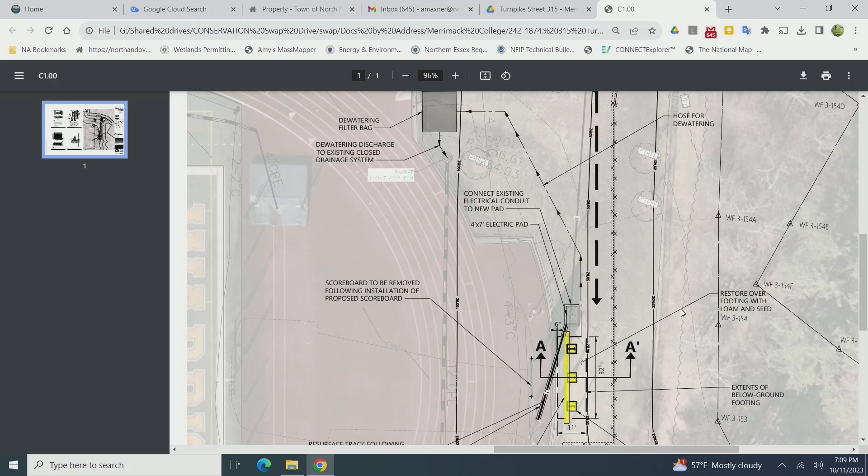They have submitted a request for a waiver for earth disturbing activities in the 50. However, no structures are going to be in the 50. So I'm thinking they don't really need a waiver to operate machinery and then return the area to pre-existing lawn area, but you guys can talk about that.

So that structure doesn't require a waiver? Right. And Jeff with VHB is with us this evening, representing the college, if you have questions for him. Yeah, I think it means it's outside the 50. Permanent installation. Right. So all disturbance is temporary within the 50-foot no build? Correct. Okay.

I watched there was an energized meeting last time you guys talked about this, and I understand where we are. I just have one question for you. One of your representatives represented that they were remorseful of how the project went, that the cart was put before the horse, that construction started before approval, and that it won't happen again. What I didn't hear was what went wrong, and I'd like to understand a little bit about what went wrong.

Good, I'm glad you're here, Felipe. For the record, Felipe Schwartz, Merrimack College. I think what went wrong was just a series of bad communication, right? We have a vendor with a contractor that got ahead of themselves. And they went ahead and did stuff that, in hindsight, I should have had a closer view of what they were doing, but it's a crazy time of year when it happened. So as it was going, I should have been there.

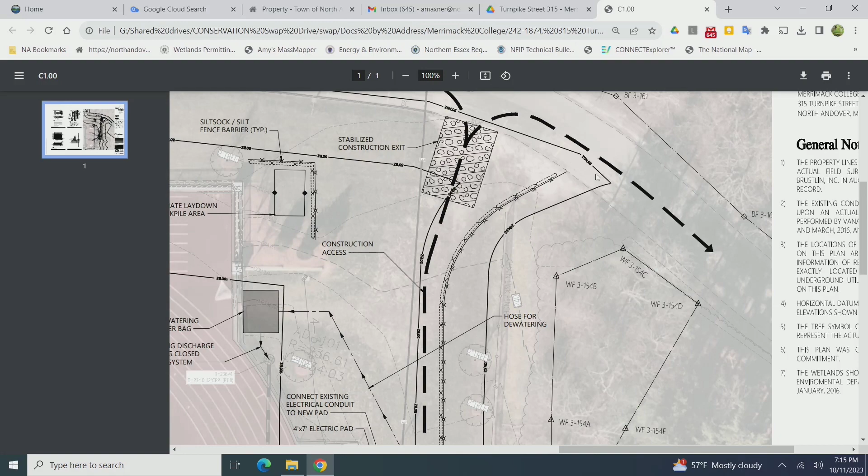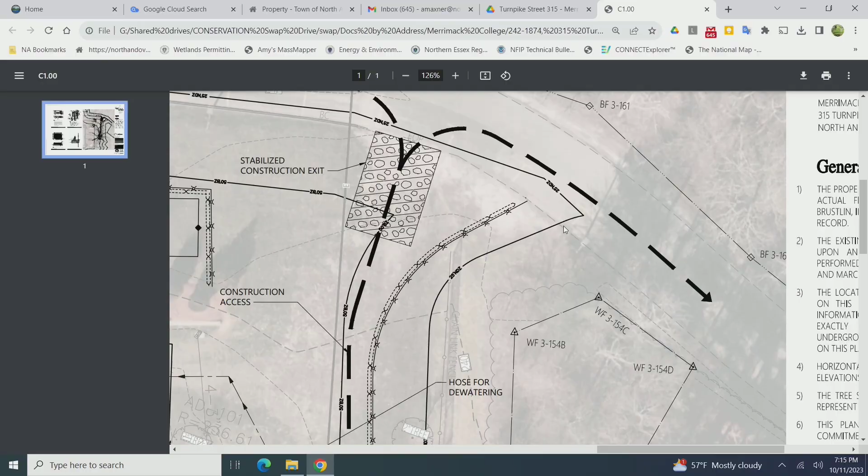Just a thought. How does snow get managed, I guess? Just a concern if it's an area where they pile it. We don't pile it there, right? That would probably prevent snow stockpiling in that area. We wouldn't stockpile snow in that area anyway.

Okay, so we can condition that, and Amy can direct plantings and location. Okay, so Amy, you're saying that they don't need a waiver, correct? No, because I don't see an alternatives analysis on this. Right, no, because structures are out of the 50.

Okay, all right, any more questions? Motion to close and issue decision within 21 days. Second? All those in favor say aye. Aye. Opposed? That's unanimous, thank you.

Thank you, okay, thanks. Hopefully I'll see them.

Justine, is Al right there? Is Al right there?

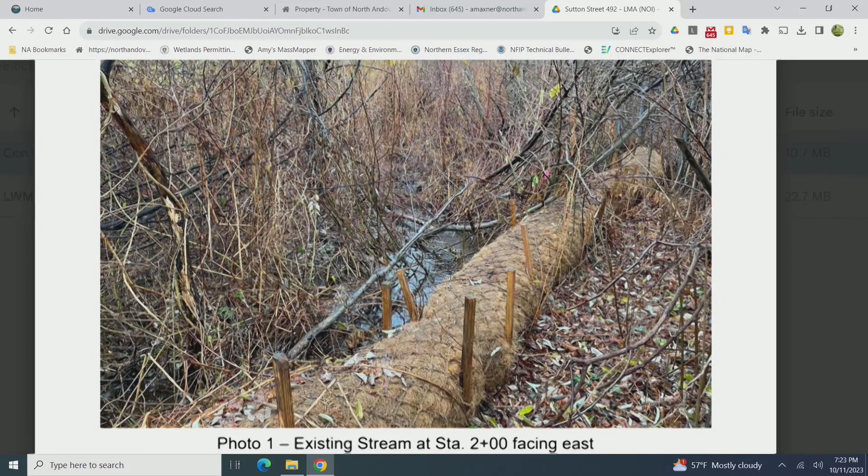The enforcement order issued over a year ago now, I called it a friendly enforcement order, allowed the airport to immediately get in there and put some temporary provisions in place. The overall purpose and need for this project is that we have a stream channel that has gradually lost elevation due to debris, vegetation, sedimentation.

And now the bank height at this particular location, this is pretty much the problem location. You'll see the stream on the left right there, and this is looking upstream. We have lost so much bank height there that storm events, without that coir log you see in the foreground, are subject to overtopping at the bank right there.

This is the section. So above this section you have certain bank heights, and below this section you have incredible bank heights, 2-3 feet or even more. But for this particular section, bank heights are a foot and a half, less than that at some points. It doesn't take much, with all the urban runoff this stream gets and its flashy nature, plus some of the storms we've experienced lately, for this to overtop.

As we recall that aerial photograph you saw, any water overtopping this portion of the bank flows generally west-southwest and does encumber portions of the Matthews Way subdivision drainage system, and also business along Charles Street as well.

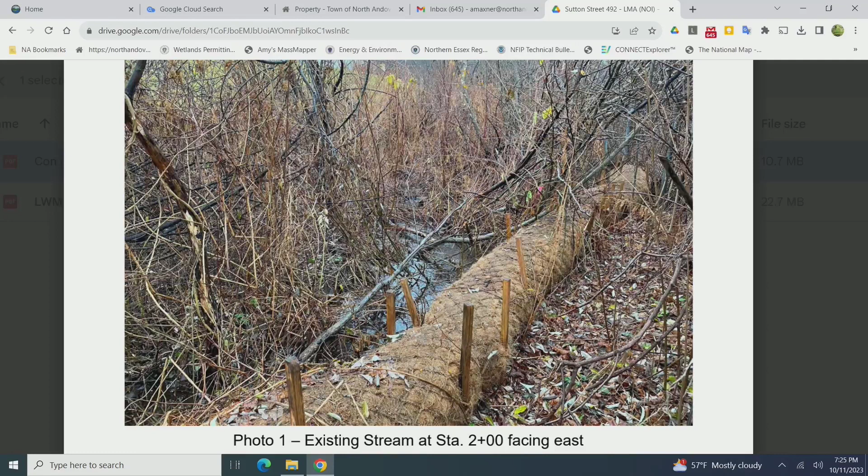These coir mesh logs, we had a lot of experience with them. We put them in place and they've done a really good job. Once they get wet, they hug the ground and put water back in its place, and they've done a pretty tremendous job. We put it for a good length along this portion of the stream.

But we amended the enforcement order, I think twice. We actually diverted more flow to this stream up at a red maple swamp above this channel to try to get more flow into here, because there's still flow beyond the airport property line that is getting down and causing some of the issues and concerns that have been voiced to us and to the commission over this past year.

And so these coir logs have been employed in several locations, not only to increase bank height but to divert flows and keep them in this stream, hopefully not adding to the problem being experienced downstream from this.

Next, Amy. This is looking downstream, just up from right at the Big Bend. You can see the airport fill platform, the green grass in the upper right. The left is the airport security fence. We're right along the airport property line at this point.

This basically shows the diffuse nature of the channel. The channel has really been lost as far as wood debris and sedimentation. It has filled in, and our bank height is almost nil at this particular location. Next, Amy.

And then a close-up where the stream is right against the airport property line, actually exposing one of our concrete bollard supports for the perimeter security fence. Something to note here is that this stream, immediately to the right or on the south and west sides, is completely bordering vegetated wetland for most of the route along our work area, whereas on the airport side we have bank but we don't have bordering vegetated wetland. That comes into play pretty significantly here when we talk about the design.

So, the important parts of our plan — this is a nice generalized list. I put a 1, 2, 3 summary at the start of the notice of intent outlining what the major components are. I'm going to go over those components real quick.

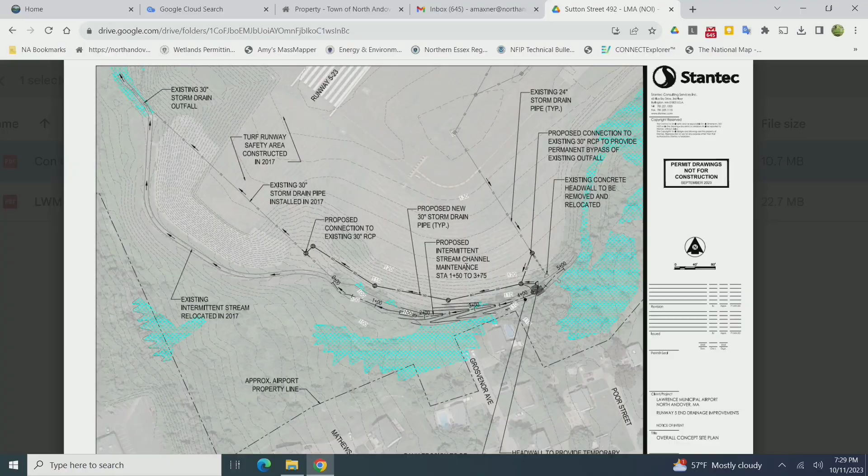Chairman, can we pause for about two minutes and ask a question? I want to form a basis for where Randy might go with the design. So you did gain a lot of experience and empirical data by seeing it happen — that's very valuable.

No doubt. There's been a lot of thought and concern that the source of the problem is multifold — it's the airport, it's the side streets, it's up above town roadways. Based on your observations, are you able to attribute this discussion we're about to have to address all of those, or just the things originating from the airport? No, it'll address the airport's issues and portions of the off-property ones — but not all, definitely not all. That would take almost a master planning type effort on behalf of the town, some private residential properties, and the airport. Would be quite the undertaking.

But I think what you'll hear is that what we have in place definitely takes care of our airport water, adds some of that residential water, maintains it into our stream, and more importantly gives this channel a volume capacity to withstand some of those larger theoretical storm events. Thank you very much.

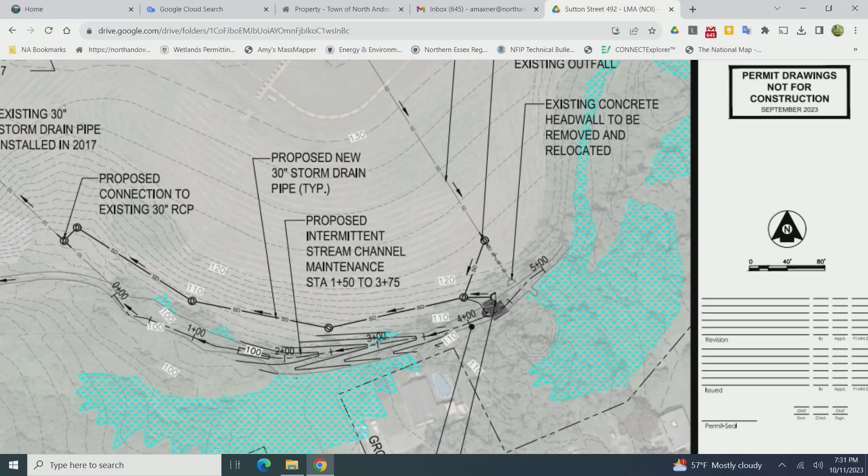First off, there is an existing stormwater outfall at the head of the system. It's a 24-inch outfall, currently draining approximately 15.5 acres of land on the airport property. On the plan it's called the existing concrete head wall, to be removed and relocated. That water is let into the stream above the problem corner where we're seeing the overtopping. We want to take that water — which is all stormwater, no base trickle coming out of there, no base groundwater flow — it's dry or wet depending on storm events, and that's it.

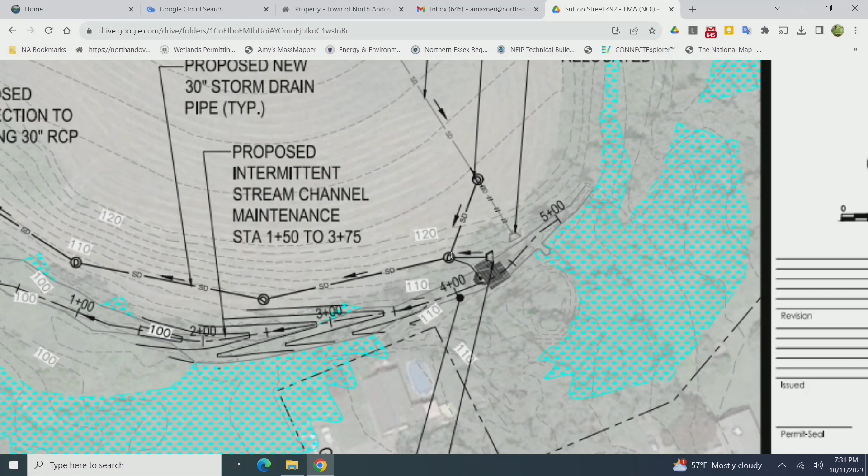What we want to do is take the peak runoff that particular culvert end adds, and route it around the problem area. It would be a significant undertaking if we didn't conveniently have a temporary bypass culvert, a heavy-duty one, that we had put in for the 2016 project. If you recall, we put a temporary culvert in to contain the flows and give our relocated stream in 2016 a chance to grow in.

Erosion control fabric is one thing, but if you're trying to do soft solutions, you've got to get that vegetation to grow before you dump some of these heavy flows into it.

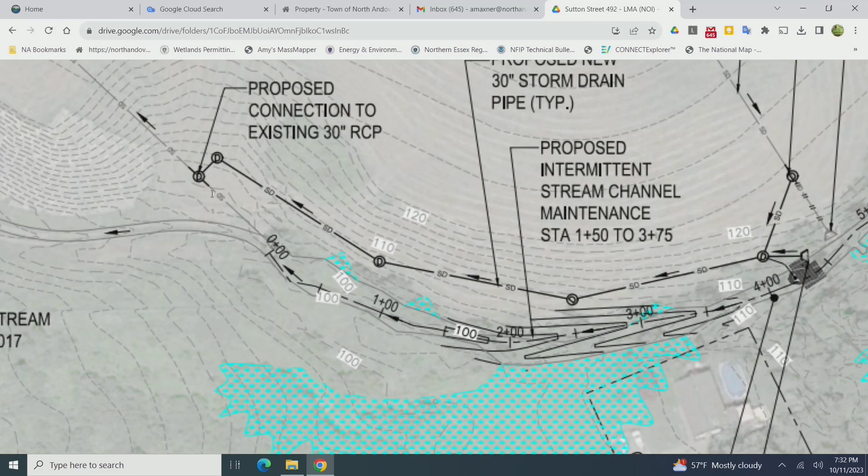So we put in a large 30-inch bypass culvert that we used to direct the high flows into while the relocated channel from the 2016 project got vegetated. And it worked perfectly. That thing is just sitting there now, a lot of public expense. It was a class 4 culvert because we had so much fill on top of it. It's a heavy-duty culvert, and it's a good size one.

We have the ability to reroute our 24-inch culvert above the problem area to downstream of the problem area by putting it in that culvert. It takes 15.5 acres immediately out of the watershed of the problem area, and it's stormwater that we're taking out of there. Like I said, there's no base flow maintaining wetland vegetation here—this is an outfall that flows only after storm events. So we'll be taking that storm flow and putting it downstream of the problem area, intercepting it with a manhole, taking that outfall out including the headwall, and revegetating it with inland bank, coir logs, loam backfill, live stakes and stickers, turning it back into vegetated bank at that location.

Where does that ultimately discharge? Is it over by the culvert underneath the railroad tracks?

Yes, so there are two downstream culverts. When we talk about dumping more water into this stream, I want everyone to remember this stream doesn't leave airport property and go right into the Merrimack River. There's the sewage treatment plant culverts under their entrance road, a nice double culvert, heavy duty, has always withstood all these hard storms, but it is theirs. Right below that is a less heavy duty one under the railroad tracks, in a very thick, nasty place to get to. But there are two owners of other drainage structures downstream from us that we have to consider during this whole process.

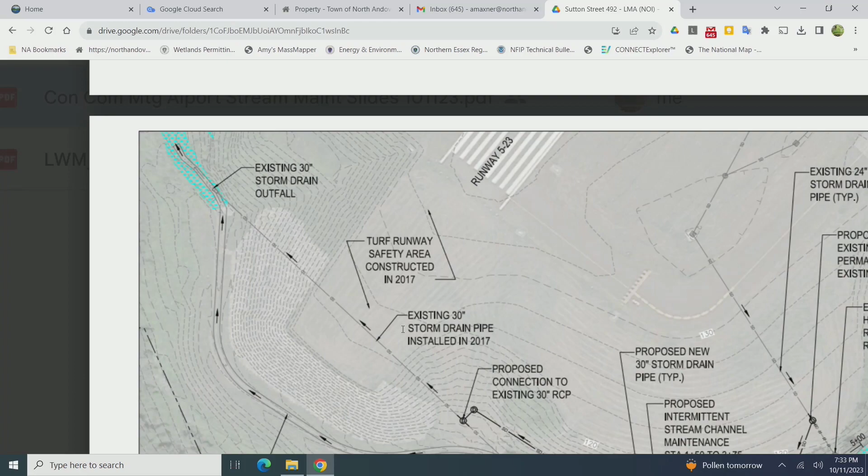Thank you. So the first big effort here, and this is one that was added late, was putting that series of manholes and pipes in on the upland green slope, putting it down, getting the slope necessary to get the water to that 30-inch bypass culvert and putting it in there, restoring it all to the same green grass slope as it is right now. So that is the first effort.

The 225 feet of stream that will be rehabilitated will have a basic cross-section with a 4-foot flat bottom contour, then going up on 3-to-1 side slopes on either side, creating a minimum 3-foot high bank along that section. Some sections meet grade and get higher banks because the natural contour provides for them, but for this section where we really need it, we want a bank height that contains the higher theoretical storm events. This particular profile obtains that control for us.

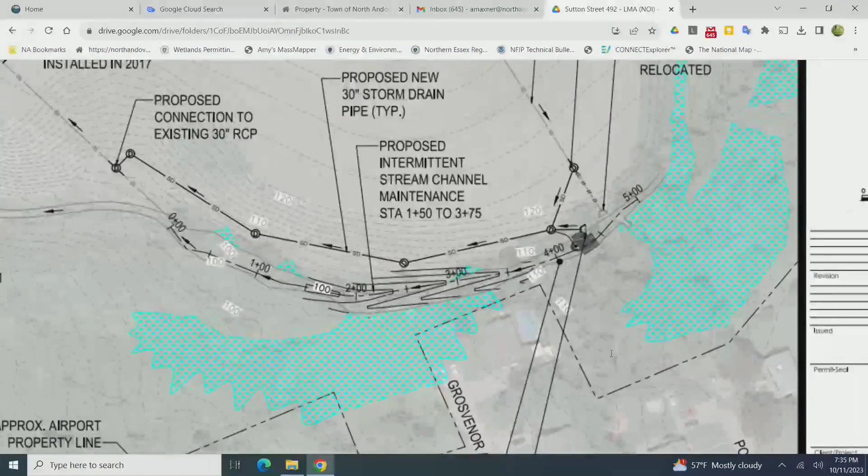It is very similar, that cross-section, to the cross-section we used in the channel that reroutes around the runway 5 end from the 2016 project. So again, that basic typical profile through the stream is a 4-foot bottom section, 3-to-1 slopes going up each side to a minimum bank height of about 3 feet.

Now, to do that, as you can see, the blue right there is all wetland. So on the opposite side of the stream, if we tried to make that bank, it would have entirely been in bordering vegetated wetland. We would have been into thousands of square feet of impact to BVW, off-site mitigation, all the things we went through for the Runway 5 project. We were fortunate that on the opposite side there was very little vegetated wetland—it was just bank and then upland. So we actually shifted the stream a little bit towards the airport to provide for that bank height, only impacting 155 square feet of BVW.

Also, if we tried to do it on the other side, the airport perimeter security fence, which is on the property line right there, creates property line issues very close by as well. So by shifting it, we take a little bit of the bend out of it, and we're also able to fit it in while minimizing wetland impacts—kind of a win-win in that particular instance.

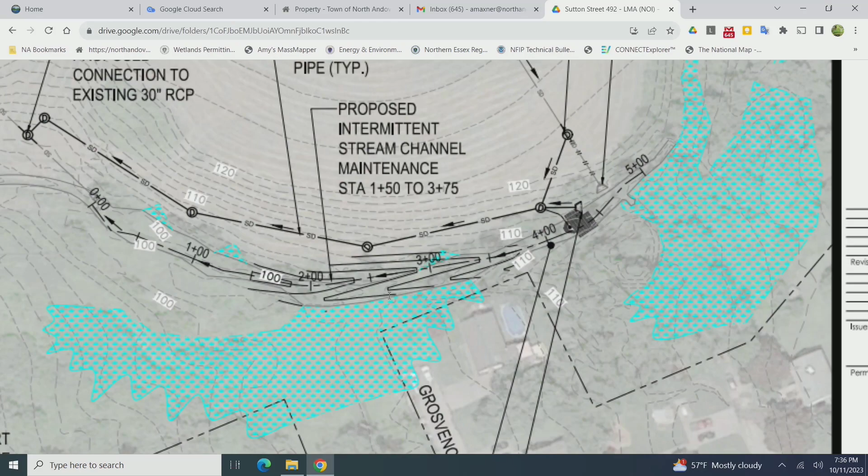We also took into consideration that the best alternative from a drainage standpoint would have been to load this thing with hard armor—put Mirafi fabric in there that'll last 100 years, big 6-inch surge stone, 100% compaction of very dense gravel on the bottom, and make this thing handle anything. Well, you try that with the permitting agencies, us included.

We are always trying to look at soft solutions. Can we get away with something that restores the functions and values and meets the performance standards, but still addresses our purpose and need? In this instance, using aggressive but biodegradable erosion control fabrics on the bottom, less aggressive up top, and a combination of plantings, we can achieve that aggressive, stable platform we're looking for, but we need time.

Just like we did with the 2016 project, we need a minimum of 3, more likely 5 growing seasons worth of growth of the live stakes and stickers to get the adequate shrub root density needed to stabilize this. So the next feature of this project is a temporary interception of the entire stream in a 30-inch culvert upgradient of our work area, putting it in a bypass pipe and keeping it there while we let this grow in for a few growing seasons, then restoring it.

It's a sandbag dam. We're actually using the head wall that we take from the 24-inch culvert for the temporary pipe right at that location, giving it a nice stable entrance. The sandbag dam will divert everything into it. Even on the back side, if we get something significant or seepage through it, we've allowed for a designed pump station to pump into that same manhole to prevent leakage.

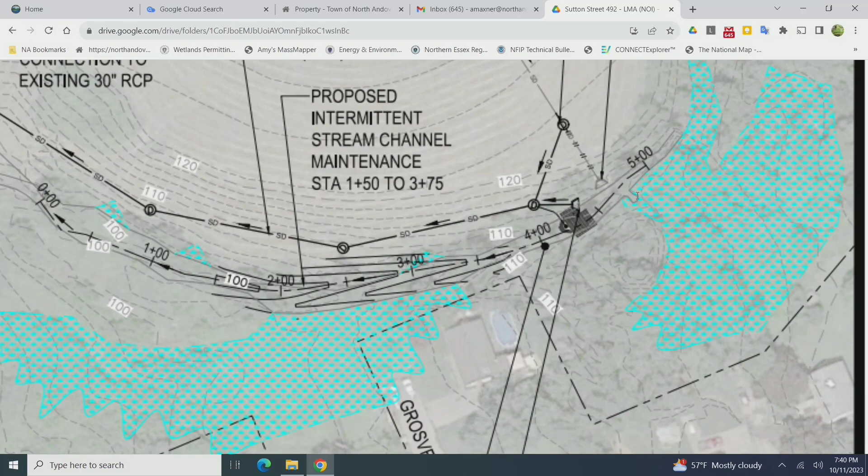So in a nutshell, we have 225 linear feet of stream that we are redesigning and rehabilitating, plus about 100 feet of bank upstream we're trying to repair for bank scars. This leaves approximately 150 linear feet of natural stream channel between the end of our project and the start of the relocated stream from the 2016 project. We have investigated that cross-section.

It has extremely tall banks on this west and south side of it. We've never seen it overtopping during any of the events. We tie into that large contour, that large mound that we have along that side of the bank. We see no reason to take this any further.

It would seem a logical conclusion that since we're creating a new profile here, match it to the profile that we created in 2016 and just join the two. We just didn't see any net benefit in that, number one. And number two, we're supposed to be minimizing our wetland impact footprint, and we just don't have the drive, the purpose and need to address that 150 feet below our project. So we will not be doing anything with that.

We didn't see any backwater effect from that area too. It has the dense vegetation and everything like that, but it's stable. We don't have the bank erosion in that section, and we just didn't see any backwater effect from it that's causing us to rethink not going down further. So we think this 225 linear feet is enough. So you can go on to the next one, Amy.

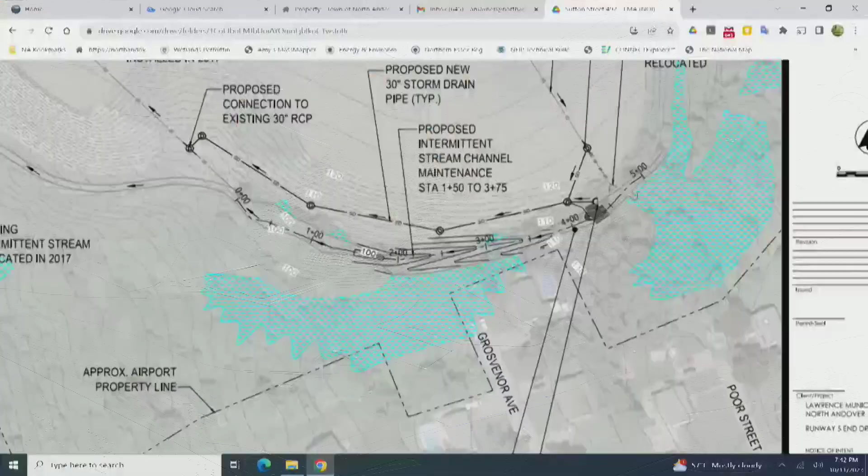And this is it in plan form. Shows all the contours that we have to recreate on this project. But if you go on to, in this picture, you see the grading scheme. You see the sandbag dam upstream of the project with the pump station and the temporary bypass pipe.

You see the removal of the 24-inch existing stormwater outfall. And then on the other end of the project, you see where we're going to put a drain manhole over the existing pipe around the 5 end. So that last manhole in the chain there is going right on top of that 30-inch pipe that we put in 2016 and get that water in there.

It would be an obvious question, what's going on at the end of that 30-inch culvert there? When we did the 2016 project, we found in the field that our limit of impact that we mitigated for, et cetera, we never got to that point. They were able to daylight this pipe even a little bit short of that. So we actually had some really good riprap pad that we were able to put in there.

Some of this riprap's quite large. It's 10-inch, 12-inch, even a little bit bigger than that. This thing has been stable through all the storms that we went through since 2016. It's a great stable outfall, shows no erosion whatsoever, and the channel immediately downgradient from it is not showing any wear or anything like that either.

So this stormwater, which is currently getting to that location, is just going to get to it a little bit closer at this point. We didn't have any concern with the condition of that outfall being able to handle this subtle change that is occurring here. So, next one, Amy.

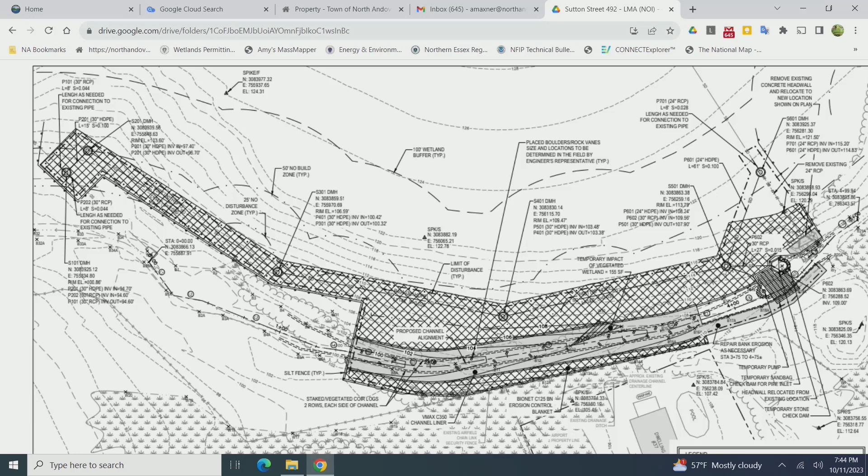So I just want to let everyone know that we're even under a half acre with this particular design that we have right now. Next, Amy.

You can go on. The typical cross-section as we show right there, you'll see the 4 feet on the bottom, 3-to-1 side slopes to either meet grade or have that top embankment height. And then you'll see the coir, 12-inch coir fiber logs installed at a certain elevation.

We have the heavy compacted gravel under a certain part of it. We do bring topsoil on top of that compacted gravel down to a certain elevation. And after the C350, the long-term erosion control fabric in the critical areas, above that we have the real biodegradable C125 above that to let the other seed mix grow.

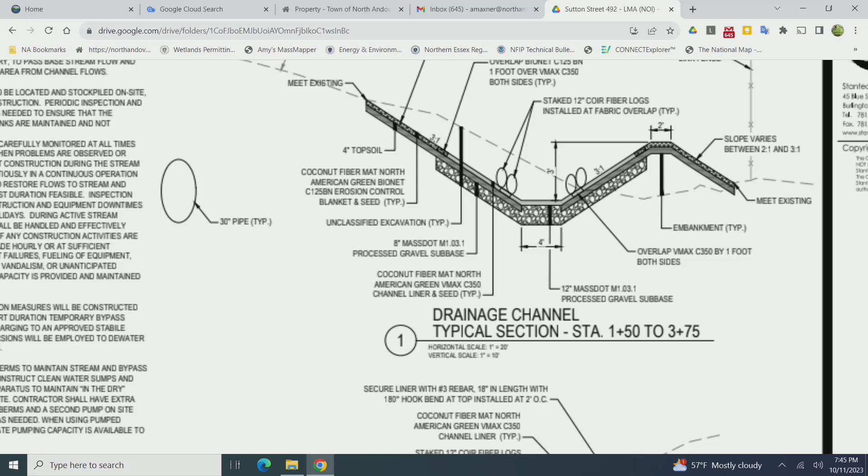So it's a real hodgepodge of overlapping fabrics and staples. Those coir logs are integral in holding that erosion control fabric down. And then you have the stakes and stickers that we stick right through these meshes that hold it down as well. So between the staple pattern, the plantings, and the weight of those coir logs, that's what we rely on for the stabilization of the cross-section.

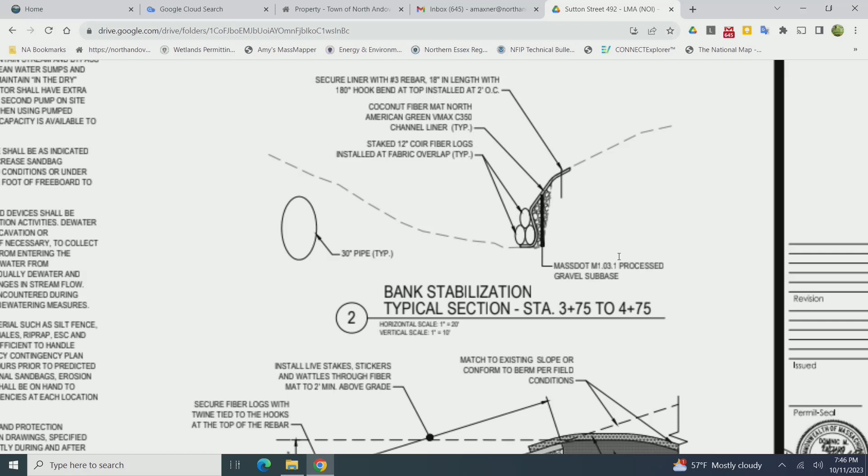We also are going to be using a pyramid scheme to repair bank sections upstream. We're going to be using the heavy fabric, put it underneath a trio of coir logs, put that fabric up onto the bank and staple it, and then stick some live stakes and stickers behind that, trying to get some roots growing, some wetland shrubs growing in behind those bank sections. But those coir logs, once they're wet, will buffer that area from direct flows while those areas stabilize.

I won't get into that one right now, Amy. We'll go on to the next.

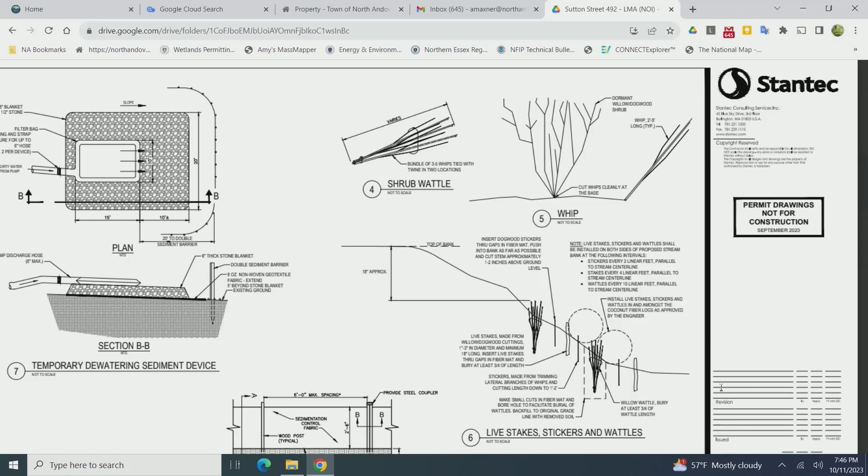This is just the specification for our live stakes and stickers, how we put them in, the spacing and things like that. It's the same specification that we used in 2016.

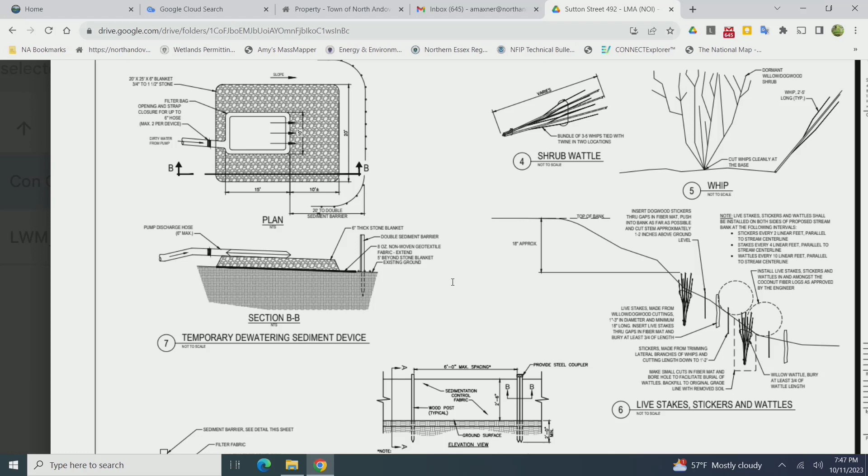If we do need to discharge any muddy water from the site, we will have provisions in our specifications for the basic filter bag on top of sediment. There's nowhere to put this stuff. We are at the bottom of the watershed, so we're going to need something pretty aggressive to get sediment out, not just a silt fence ring. So we will put in the specifications something as aggressive as this, with filter bags like we've used before that do a good job, just require change out pretty often. We want to make sure we're addressing the erosion sedimentation control portion of the stormwater standards with some high-end things of that nature.

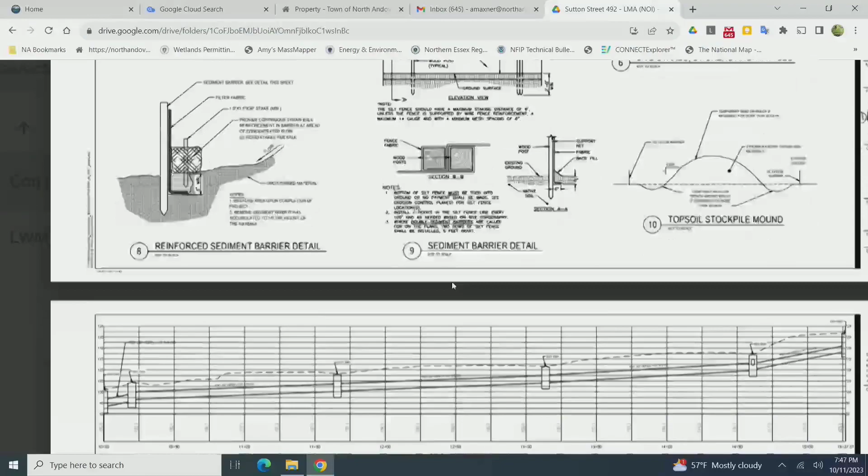Keep going. That doesn't translate well to this situation. Go down to the next one.

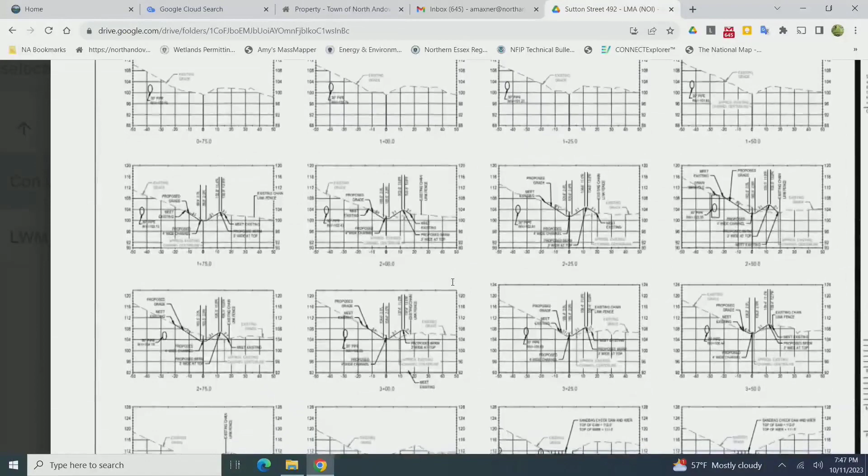The cross sections that you'll find, we provided cross sections of the proposed channel versus existing condition. For this channel section from below the work area to above the work area, we did detailed topographic survey of channel cross sections and up into the uplands on both sides. So we have a detailed survey worksheet that we worked off of to create these cross sections. It was based on actual field data recently collected, not based on any old data we had sitting around. I just wanted to get that point across.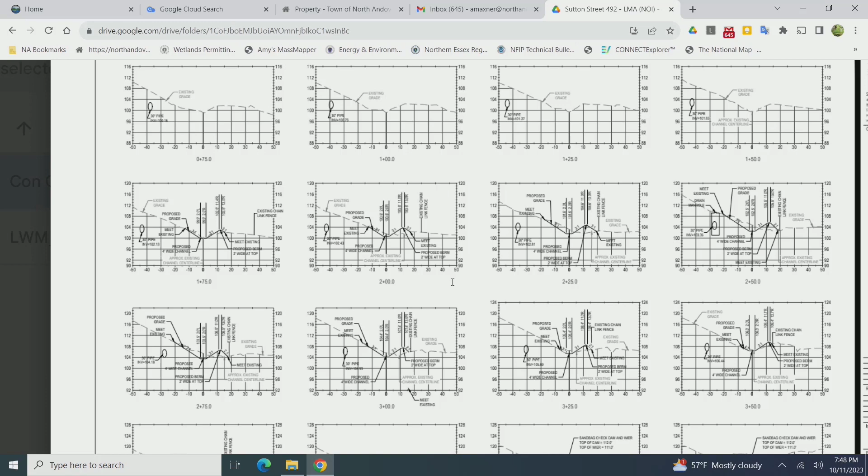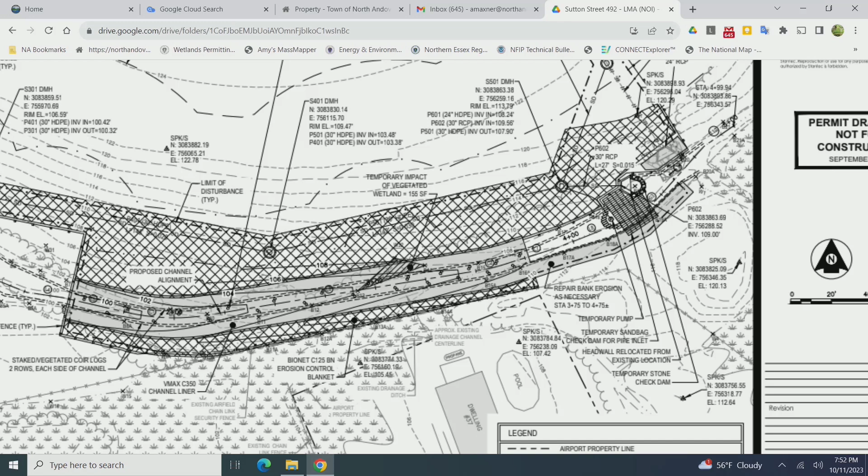So that location that Amy's pointing to right there, that is the relocated head wall that we're using for our temporary bypass. It has filter bags in front of it, and then it has the big sandbag dam. Two things we can do there. We can remove that head wall and that pipe all the way to the manhole, plug it up, and you have the bypass going through. The other thing we can do is remove the head wall and put one of those inflatable, heavy-duty inflatable balls in there that contractors regularly use, blow it up, and it's a permanent plug.

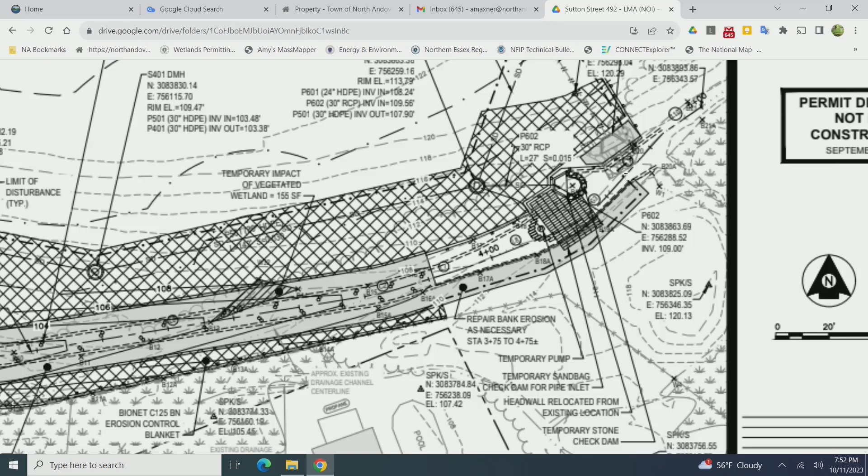Good thing about that is if anything ever happened here, we have a place that we could potentially open up again pretty easily and use again. We would tend towards that if we could - it would save us having to dig up all the way to that manhole. So that is what we're proposing right now: the removal of the headwall and plugging it in place.

Okay, so I guess that means that the project design is reliant on that rebuilt stream bed to take every bit of capacity that comes down there, including the 15 acres of runoff. No? So we have 2 - so the 15 acres gets diverted right away.

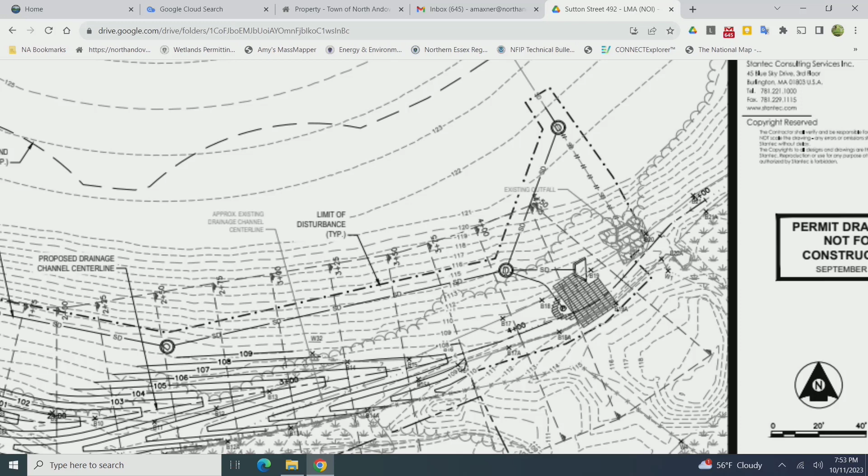So look at that. Yeah, let's do this one right here, that's a good one. So the existing outfall, if Amy can point to that, is right there - yeah, right there. That will be immediately ceased, and so we'll put a manhole in there. Permanently? Permanently. Okay, that will never be restored. So that is a permanent section of drainage manholes and pipe that will always be in place once this project is done, all the way down to our 2016 culvert.

The temporary portion is that second drainage manhole right there. That's the temporary one that is taking all the flow, allowing us some time to let this thing stabilize with vegetation. That's the one that would be plugged, but the rest of that bypass would always just be that short section? Just that short temporary section, that's it. Okay, got it, that makes sense to me now.

And the sandbag dam is substantial - it was as big as the one that we used in 2016. It's a removable fill. I'm going to use a better sandbag this time because 5 years later a couple of them definitely fell apart on us, and it fell on poor airport staff to take those out. So, but in any event, it's a removable fill, and all those sandbags will be taken out.

So would it be safe to say that your design requires the rebuilt stream bed to transfer less water than it does today?

For the duration of the stabilization period, once it's deemed good—minimum of 3, maximum of 5 years—we let that whole stream flow again, all the way from the red maple swamp and the neighborhoods. It's all released into our section again, and this functions as it does today, but with a better, stabilized profile.

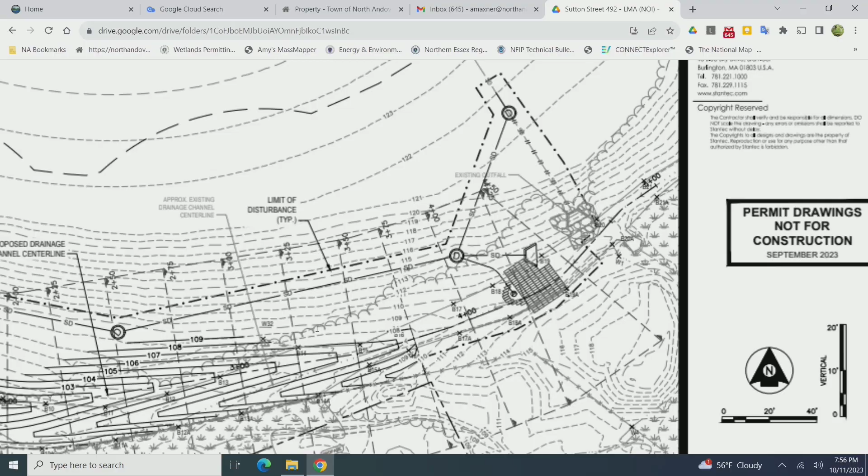Okay, good, I'm all set. I'm going to defer to Mr. Lynch.

You're not allowed to retire—you have to give it up, you have to stay at the airport, you have to solve these problems because nobody knows what you know. I was building a fieldstone wall today and enjoying it immensely. You're missing your calling, but you've had your calling.

I have—fabulous, the whole concept makes complete sense. Taking the acreage and diverting it, keeping what's from hard surface in a hard pipe, and discharging it to a hard system further downstream makes complete sense.

It's early yet, and we have a long way to go with review, but I think that temporary bypass to divert it out while the stream bed establishes is a great thing to do. But rather than just plugging that pipe, there may be a way to set critical elevations—install a weir in—so that when the stream can't handle it, the excess flow finds its way down that pipe as well. It's a really good idea, and wouldn't be hard to do.

If you look at the 100-year theoretical storm event, we're looking at around 200 CFS in this stream—don't quote me—which means we're bank full and then some on both sides. Taking a little relief off these sections certainly wouldn't hurt, and it would keep plenty of hydrology in the stream to help it thrive.

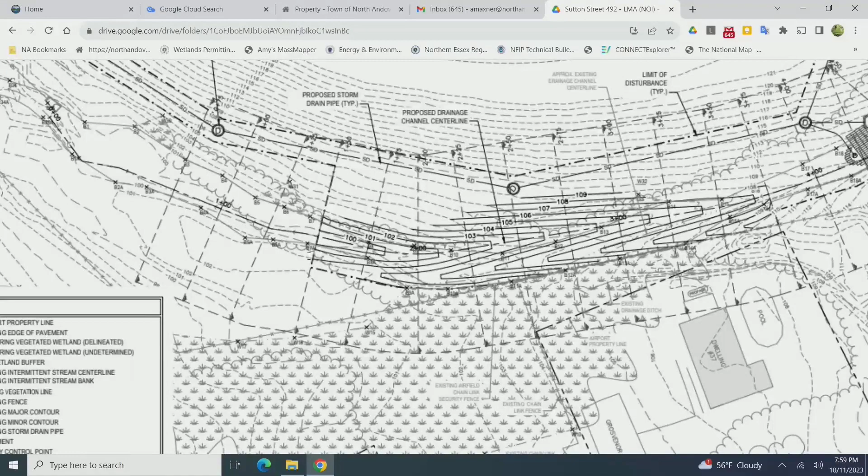What dictates the elevation we can actually dig down to is the portion of the stream we're actually marrying into. There's a hard elevation we can't go beneath, or we're just creating a swimming pool, right? Correct—with no function at all, permanently flooded, et cetera. And then there's the elevation we're dealing with at the upstream limit of our work.

So when you look at those two elevations, it created about a 3.8% slope on our stream. I'd love it to be less than that, but that's what we're dealing with. We actually decreased it a little as we got down to the section we're dumping back into, but it's about a 3.8% slope.

This stream has more elevation to it than anyone would realize. Just because it's so vegetated, it's hard to see, but it's got some slope to it, and there's a base elevation of this stream bed that's been dictated to us by those existing elevations out there.

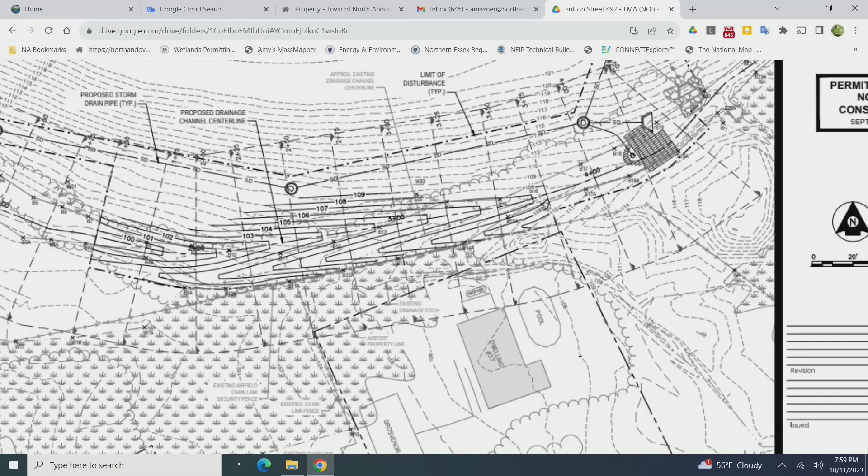The areas that have silted in—typically silting in occurs when you slow velocities down and give an opportunity for that, right at the corner. You flatten it, you have that sweet spot between preventing scour versus not inviting sedimentation accumulation. Is it any surprise that it occurred right at the corner at the bend in the stream? Pretty obvious, yeah. So hopefully with some review, we'll put some emphasis into that as well.

But if silt was getting in from other locations, what are the opportunities to prevent silt from finding its way down to this point to begin with? Where's it coming from? Was it erosion from the brook, or from the construction. We have those bank erosion scars upstream there. We also have a place where three channels meet just above this location, and we're seeing some headward erosion there.

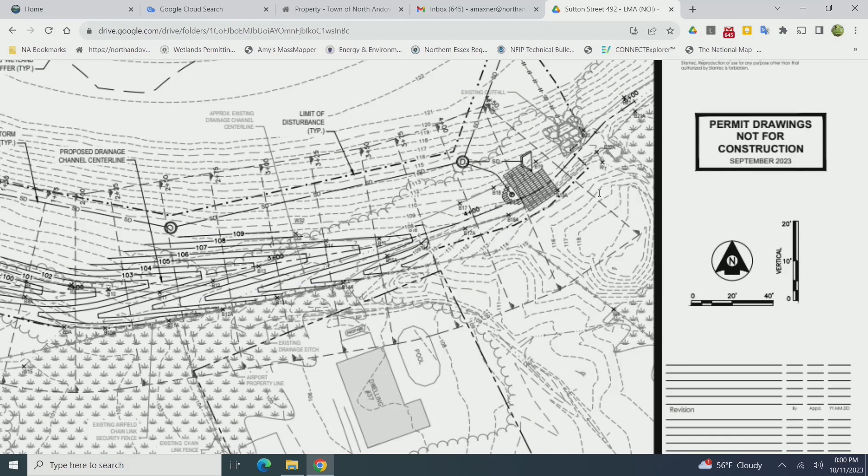But also, you're going to see water coming off the streets and things like that, dumping into this system. We do get some discharge from catch basins and things like that into that upgradient wetland. So I would think the bank collapses contributed most of it.

But let's not forget all of the vegetation that's growing in this stream too. It is just dense, it is blocked. Wood debris across the channel, creating dams. So it's a combination of not just sediment, but obstructions—natural debris as well.

It's all working together. As we know, the sediment gets in there in fine layers, and the vegetation stabilizes it. Another layer comes, it stabilizes it, and all of a sudden the natural stream bank is just a bunch of sediment, but it keeps growing year after year as more sediment gets in there. So this loss of bank height has been occurring for a long time—I don't think it was one mass event.

So, again, it was outside of your scope and responsibility for this NOI, but those dead-end side streets off of Sutton—most of them are draining back towards Sutton, correct, except near a crest at the end where they maybe taper off a bit. So there's not a lot of contributory area from these lower streets. Further up, the streets seem to slope back towards the airport, and they have for 60 years.

Forever, yeah? Yeah, I think it was Wright Ave, or the one above Wright Ave. It might have been Wood Ave. Yep, at Wood Ave we had a video during one of the one-inch events of just a pipe buried in a bunch of leaves, flowing full into that wetland. I remember that from the vegetation management plan—oh yeah, at the end of Wood Ave. We were out there when Mr.—I forget his name—Card, yeah, thank you. Card. I have a brain like a trap, but it's terrible.

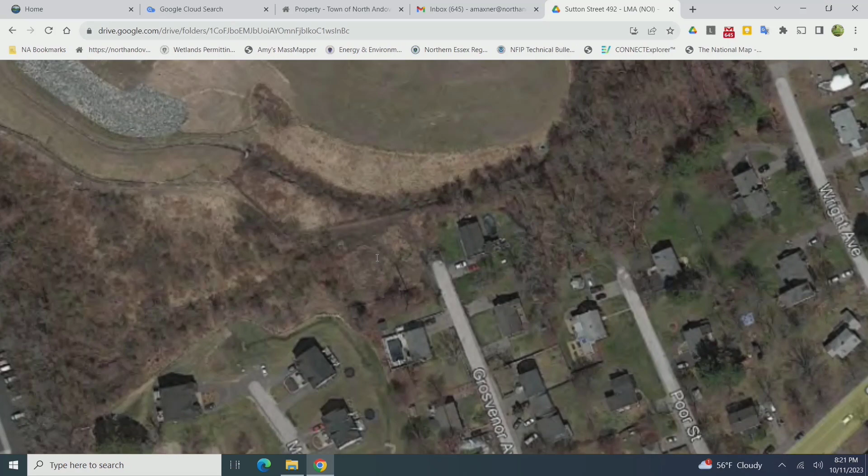Okay, and that's where this man-made ditch is that collects that water. But when it gets to the end of Grosvenor, it dumps onto the airport out-parcel and sheet flows across it. Some of it gets into the Matthews Lane drainage system. Some of it goes directly to 27. And I believe you understood that.

I guess my confusion is that when Randy described the project, it seemed like upstream of the trouble spot at the bend, the bank was pretty adequate on both sides of that trouble spot. So it sounds like he's thinking the bank is adequate, and you're telling me that it's not.

This is the stream channel that comes down from the Red Maple Swamp. It's not as well defined a stream, it's a secondary stream, that comes down towards the south and then takes a sharp right-hand turn and terminates at the head wall that's going to be removed. Where it takes that sharp right is where the breach happens, and some of the flows in higher rain events go to the left, traveling down to Poor Street. In that area, that stream channel is almost non-existent. They put some coir logs up there to divert that, or to prevent that diversion from happening. But I didn't hear anything with regards to a permanent solution.

One more point I forgot - on the segment of the 150 feet that's not being rehabilitated, this is something maybe for third-party review, but the existing conditions HydroCAD model appears to have just been repeated from the 2015 analysis. As Randy said, there was comprehensive additional topography taken through the stream. Part of our review of the original 2015 was a criticism that not enough topography was done to properly model the stream bed in those upper reaches. Now they've done that, but they didn't update that existing conditions model.

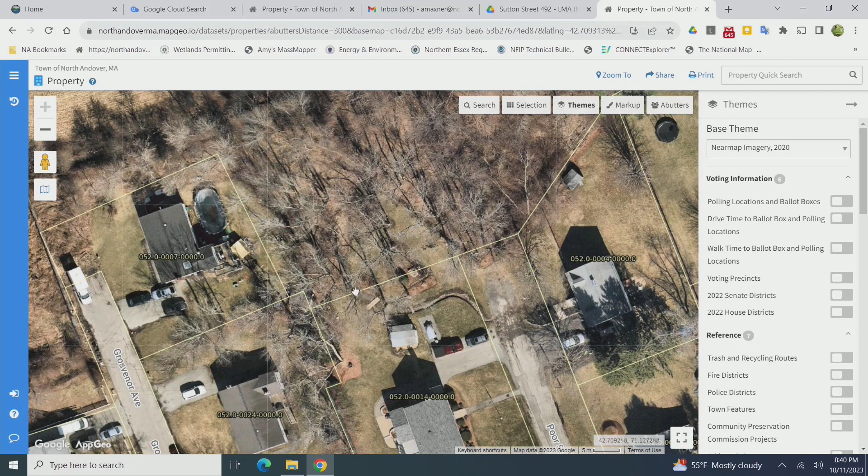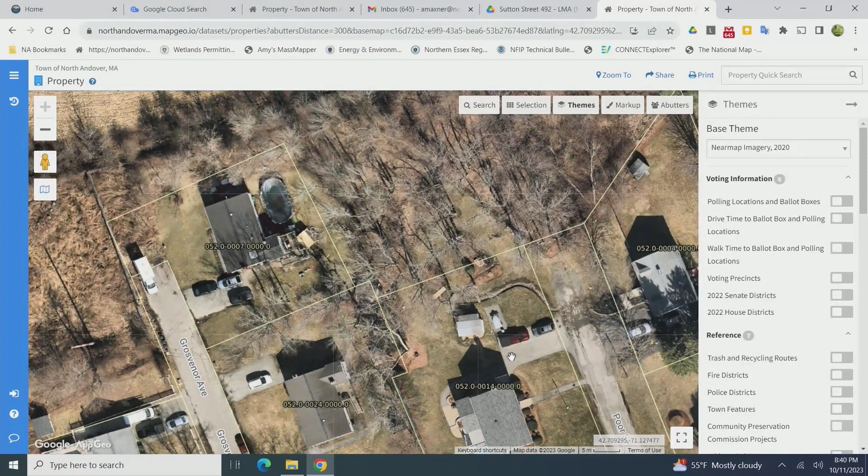But you know what, we're not gonna solve that particular issue. It's in our heads right now, so we're gonna have a conversation, and then we will talk about approaching DPW as well. It's not a bad idea. We don't want our project, trying to handle ours, to be perceived as a panacea by everybody involved here. We certainly wanna do our part, but at some point, we're not gonna do everybody's part.

But it is worth the look, as Al has said. You guys are doing your due diligence. There's no question there. To not have the conversation is irresponsible. So, all right, we need a third-party review.

So I need a scope from you guys for the third-party peer review. And again, honing in on this kind of discussion, the scope should be limited to what the NOI includes at this point. So what we just went into broadens that scope somewhat.

Especially the updated calculations, I don't want to waste any more time stretching out to another meeting, to have that meeting with Borghese and staff to result in a better understanding of scope. But I think our third-party review should look at the NOI application and any solution that the town engineering department comes up with, that it get reviewed under the context of the same review.

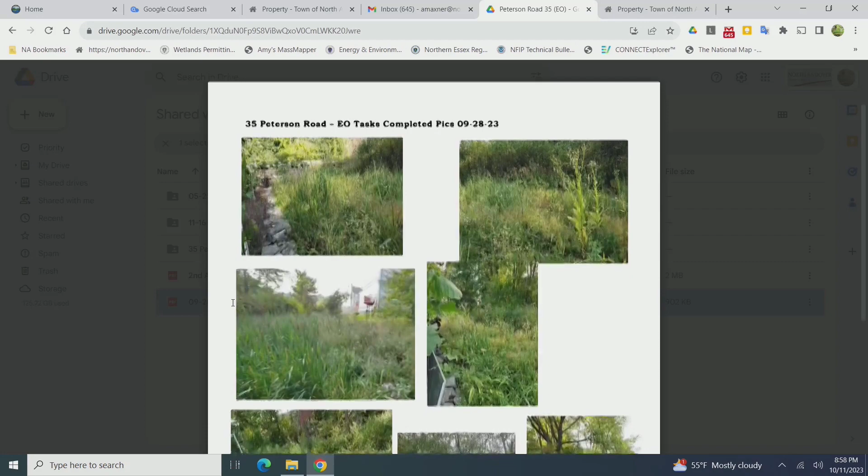So I went out there on the 28th of September, and I found an explosion of herbaceous growth - the seed, in a very good way. The shrubs are out there, but really it's all about the herbaceous, and the seed mix took like crazy.

I don't recommend any other plantings. There's nothing else that needs to be done out there. And I would happily recommend that you vacate the enforcement order, having seen that it's been met and successfully so. Any questions, Jack?

None, all set. Thank you, good, you worked very hard and it looks beautiful. Great job. Just be careful going down there, we don't want you to break your leg again. It's the height of a human being, you know, those things go - we cannot walk in there. Yeah, I know. Well, thank you for your help.

Thank you, take care. Do we need to move to vacate that board? So moved. Second. All those in favor say aye. Aye. Opposed? And that's unanimous.

Next one is 242, 634, 85 Colonial. So the commission will recall that this lot came before you under a request for a certificate of compliance. There was non-compliant structures at the rear that the commission was unable to issue the certificate for.

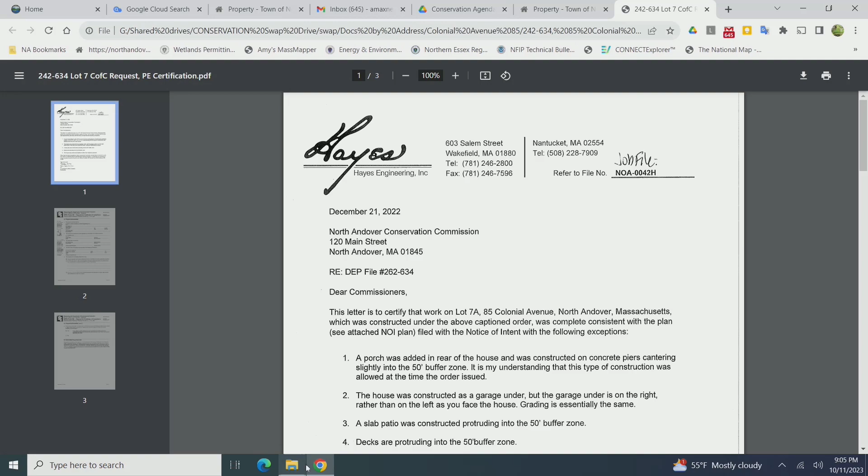So that doesn't match our dates. December, doesn't really match our dates. So you gave them a heads up. We have January, February, April, June. Is this on the open market, or is this a family member? Did you buy it as an arm's length transaction? No, this was an open market, I didn't know them prior. So January 25th, 2023 is when they first came to us for the COC, that's two months after the fact.

So we have a matter of violation. We have a house that we know with an order condition that's non-compliant. We've ordered them to come into compliance.

We have to put a deadline on that, and that's a separate problem. If it was still the former owner, we'd tell him what we told him at that meeting. I remember it's the decks - the decks have to come down, an entryway, a patio, some bunch of work in the back, and an enclosed porch.

But that's the violation, that's why he's here tonight. So he's got to resolve it, and we can work with him, but we can't do anything yet.

Did you give him a copy of all the documents? Well, what we did was give him all of the dates that this was discussed, and let him know that it's on public record for viewing, and if they wanted the minutes or whatever.

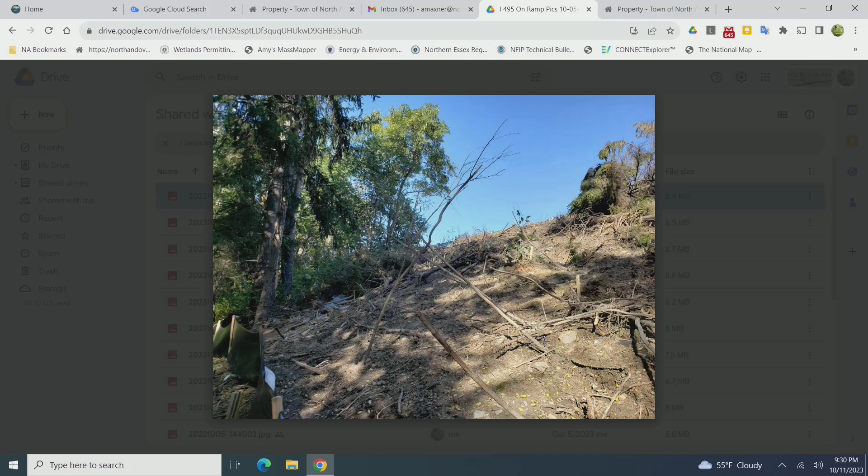How do you know it's not contaminated? You'd use your senses, you can't test every single branch. You touch it - if it feels greasy, it's contaminated. If it's giving an odor, it's contaminated.

So we don't want the wood to end up in the river - you don't want it to end up in the river. We don't want to help the beavers out in any way, we'd rather not feed them or help them. So you'd rather it leave the area? I think so - I don't know if there'll be disagreement, but if you were asking me, I'd say please get it out of there. Strip it, chip it, whatever - they can do that.

I was just thinking maybe it's easier to just leave it here. But if that's what we need to do, we'll do that. We're trying to keep obstructions out of the river.

Okay, they did some work. There is a fence there, though, so it couldn't get through the fence. Pile up on the fence? I don't know, that's what I was just gonna ask.

So you've got the ramp, the guardrail, the slope. There's the right-of-way fence, and then behind that, still some more land, about 15 feet before you get to the top of the embankment. And then the embankment drops off pretty quickly.

Yeah, it's not much of an embankment. Nothing beyond the fence. Everything is uphill from the fence, so it is all contained. So I think as far as the migration into the river and the potential of that,

it is pretty negligible, but we don't want debris there. Now, there is some opportunity sometimes to leave bigger woody stuff that you knock down as snag habitat. There's vegetation, trees that are at least this big that are there.

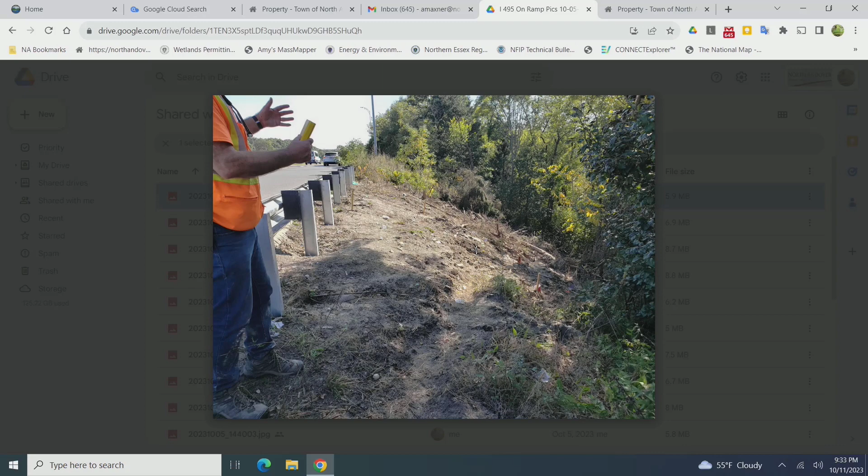No, there's a little trail -- I think when the tow truck pulled the wreck out, there's a waste oil trail, not a big one, that comes up to the guardrail. There's a patch, kind of in the center there, that's probably a 30 by 10-foot area that is a problem. You can physically see the crankcase oil further deeper into that picture. That's another area. There's another smaller area down the slope, and then there's another one at the bottom of the slope.

Because looking at this, that doesn't look very far from the guardrail. That's probably 15 feet. So with a rubber tire excavator, you could pull that stuff out of there.

Well, I don't know on that slope. I'm not a machine operator. So the people that have seen it -- some of these guys have been around for a while. One fellow was saying, from the top of that guardrail to the bottom, it's probably a 50-foot vertical.

And it's got to be 100 feet horizontal. Yeah, but you're only scarifying the top layer of that soil. So how are you Vactoring that? I mean, I have a Vactor. How do you reach that far in?

What was described to me -- I don't know if we'd have to take out some of the guardrails -- but using a Vactor with a boom, and ground extension hoses. So not just reaching over and backing out? No, it would be on the ground extension hoses as well. To me, a rubber tire excavator with a Gradall bucket would pull that stuff right out.

Well, that's been described, but that'd be the biggest Gradall on earth. Not 100, not 70-foot reach. No way, that's 70 feet. Some of it would work, but not all of it. It wouldn't work down at the bottom.

We'd have another spill on our hands because the thing would topple over itself. No, but I'm saying that wouldn't be anything good you'd want. No, the picture definitely doesn't show all of it.